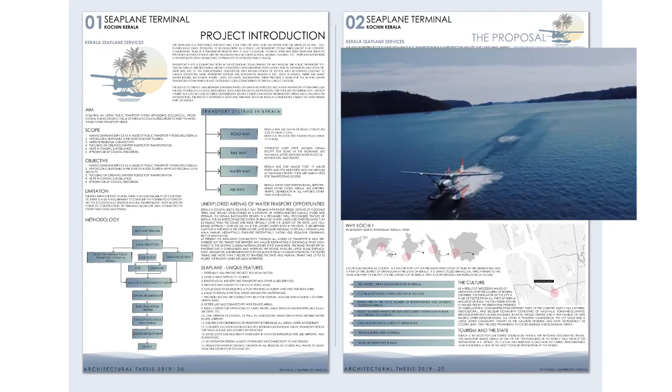So my project for the thesis 2019-20 is the seaplane terminal building in Wellington Island, Cochin, Kerala. So seaplanes are basically fixed-wing aircrafts that can take off and land both on water and airfields.

Seaplanes have a great potential to be developed as a public use transport system throughout our country, considering India as a peninsular region with a vast coastline. Though there has been seaplane services provided in parts of India like the Andaman Nicobar Islands, Mumbai, Gujarat, etc., there has never been a proper institution or a building to promote its extended public usage.

In today's world, transportation plays a significant role in the economic development of any region. The public transport systems in Kerala are becoming highly congested with growing population, and its expansion and development has led to the displacement, demolition and rehabilitation of a large number of people and settlements, leading to uneasy situations.

Although Kerala has a vast coastline of 596 kilometers stretch, it is not as much used for public transport systems. So the idea is to evolve a new public urban transport system using these coastal resources available in Kerala.

Introducing seaplanes in Kerala would improve the regional connectivity, boost tourism, and also could be used as air ambulances in emergency situations like in floods, and also there is an introduction to a faster mode of transport. This public-based transport system can also bring in a lot of employment opportunities towards the region.

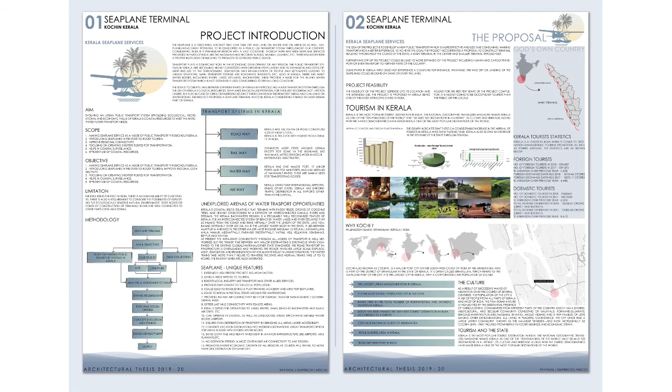For at least the first few years, the project would be completely or mostly occupied by the tourists arriving in the region. So it is important to situate the main terminal in Kochi, since it has a very large amount of tourists arriving yearly.

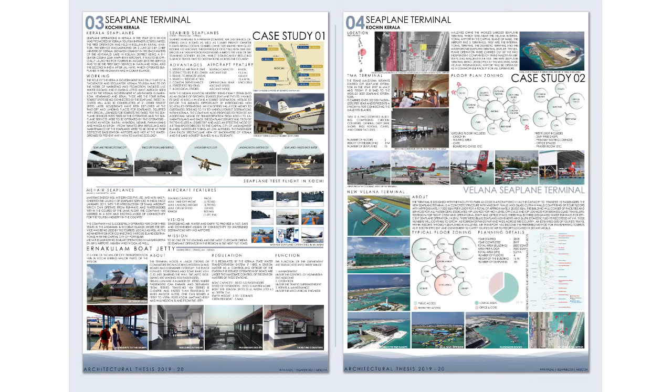These are some of the details of the case studies done for the project completion. These include some of the private company-owned flight operations in Kochi and Mumbai, and others like Velana Seaplane Terminal, which is the largest seaplane terminal in the world. Other case studies include the Miami Seaplane Terminal, which resembles the structure of a coral reef, and the seaplane hangar in Tallinn, which is a reconstruction of an old terminal structure.

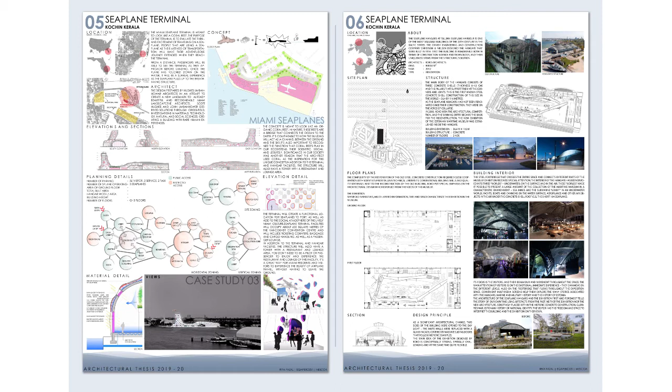The site for the seaplane terminal building is taken on the southernmost point of the Wellington Island in Kochi, Kerala. Selection of the site is dependent upon certain criteria such as area under the protected waters, depth of the seabed, maritime movements in the location, navigable airspaces, surrounding community, as well as the current flow, water level, wave heights of the water body. The site offers an area of 56 acres of land which comes under the CRZ rule and which is used as a multi-use land currently.

The site also offers a close proximity to Cochin International Airport, Vyttila Mobility Hub, Ernakulam South Railway Station, Cochin Town, Cochin Port, and Kochi Metro. The site also offers suitable climate, water levels, and speeds which is required for seaplane operations.

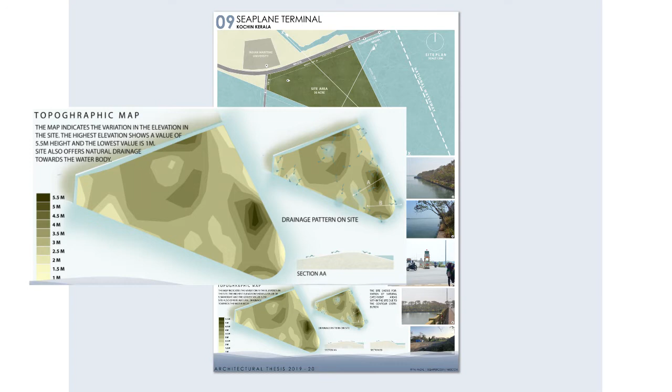The topography of the site is preferably flat and also provides a small deviation of natural drainage towards the water body. There are also small naturally formed catchment areas in the site which could be used as rainwater harvesting areas.

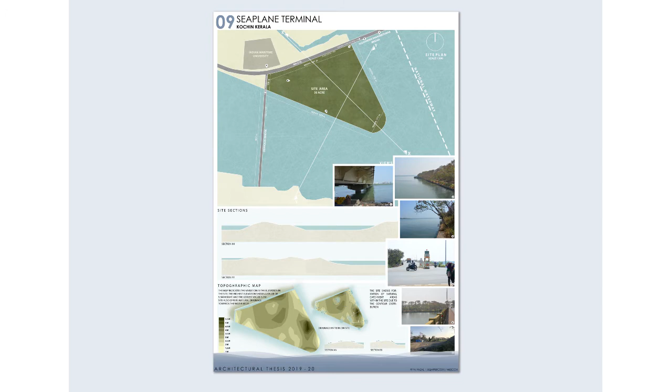The concept for the terminal building is connective architecture, where architecture plays an important role in connecting land to water and also places. The figures portray the idea of moving outward, providing best accesses and connecting land towards water. The building is zoned out partially on land and partially on water, which is connected through architecture.

There is also provision for an observatory building on the southernmost point, which gives great views towards the terminal as well as the sea lanes.

The observatory building also could be used as a viewing point of the seaplane landing and takeoff.

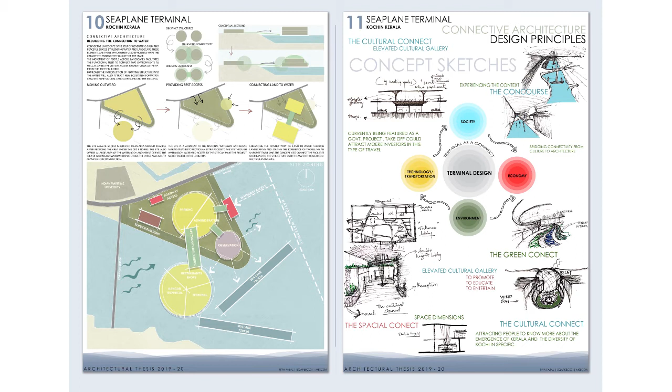The expanded vision of the concept portrays the terminal as a connect towards technology or transportation, to society, to economy, and towards environment. There are introductions of elevated cultural galleries within the terminal building to promote, to educate, and to entertain through cultural activities.

The main entry and exit of the site is given at the rightmost end, and the service entry towards the site is given at the leftmost end. There is a separate pedestrian entry and exit at the center of the site, and each of these entrances and exits have a security check.

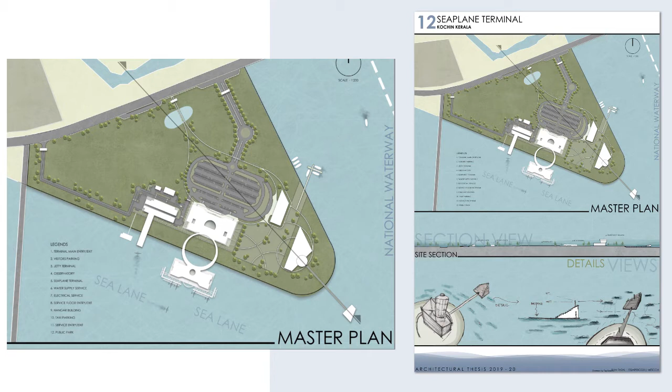The site is occupied with the terminal building at the center, and there is an observatory at the rightmost end and a jetty terminal which is provided for the access through national waterways, and a hangar building for repairing and parking of the seaplanes and other service buildings. There is also a public park provided at the center of the three main buildings situated in the site.

The main terminal building is designed in 2 floors, where the ground floor is completely dedicated towards the departure and the first floor completely dedicated towards arrival. Segregating the arrival and departure areas will help in better controlling of the traffic that arrives in the terminal per day.

The departure entry is situated on the left side of the terminal building, which moves through the baggage collection areas, reception areas, and reaches the security check area. After the security check area, the passengers could move through the open atrium spaces, which have certain utilities such as shops and cafes on either side.

These passengers then could move through the concourse area with the elevated cultural galleries on either side, and then move towards the pedestrian bridge towards the floating terminal area. The floating terminal also offers certain utilities and also an open atrium space at the center. These passengers could then move to separate gates where they are then departed towards the seaplanes.

The arrivals activity occurs on the rightmost end of the floating terminal. The passengers after arrival reach the arrival hall and then pass through the security check. These passengers could then move towards the passenger bridge, which takes them towards the upper floor of the terminal building over land.

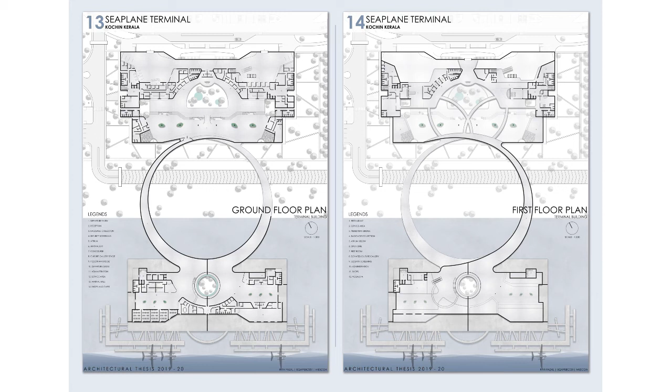The first floor of the terminal building on the land provides areas for baggage collection and also other utilities. The passengers could then move out of the building either through the stairs which are located inside or the ones outside the terminal.

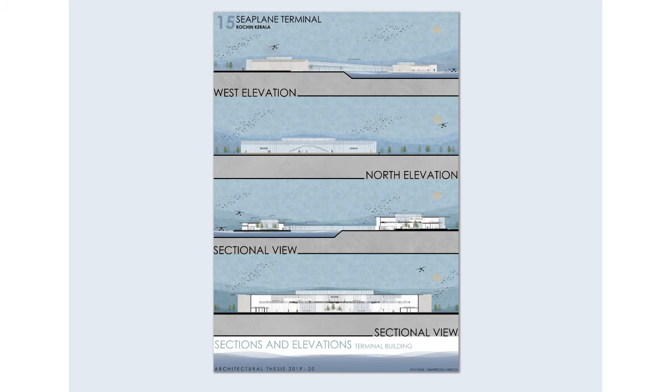The west elevation shows the ramped way of the pedestrian connections from land towards water. The north elevation is the frontal elevation of the building, which shows its double-heighted glass facade. The floating structure is a pontoon-type floating method where the structure stands over a hollow box to maintain the water levels.